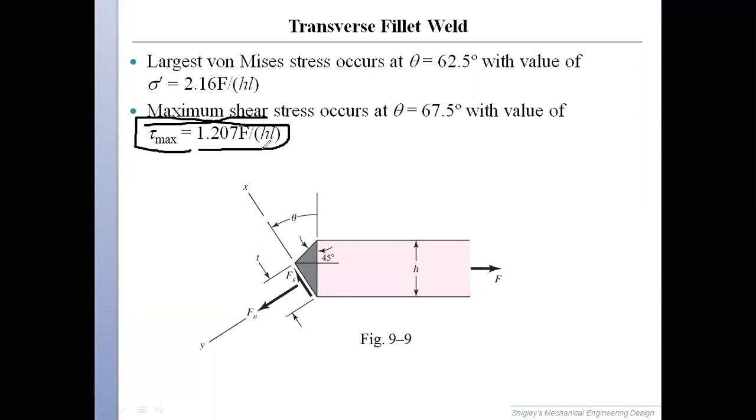We said that the maximum shear stress is equal to 1.2 times F over HL. But now what we are saying is taking the conservative approach. If we look over here, when we calculate the stress, we say that it is 1.414 times F over HL as compared to 1.2 times F over HL. So if we compare this, we are basically taking the estimate of the stress 1.17 times more than the one that we had.

So now what we have here is, okay, we are going to take this conservative approach to analyze our fillet welds. So let's see, when we do that, we can also treat.

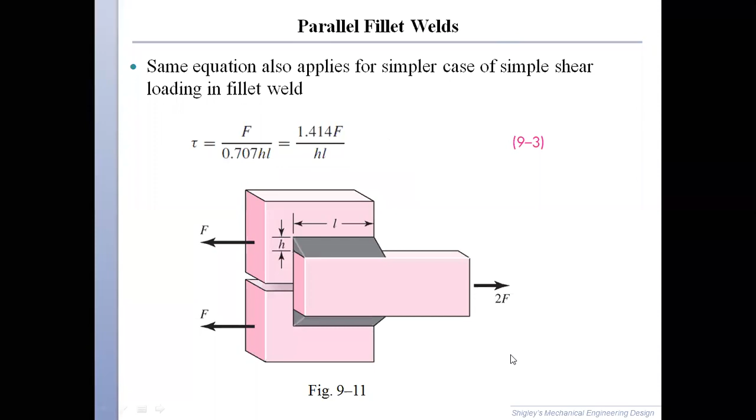Now let's see, if this is the case then let's see what we will do, there is another situation. For example, that was just straight on the welded joint, where the load was passing through the same welded joint.

But just as in the bolts where we discussed eccentric loading, we can have that situation over here, that let's say this is your welded joint. This is your welded joint basically, and your load is applied over here, right?

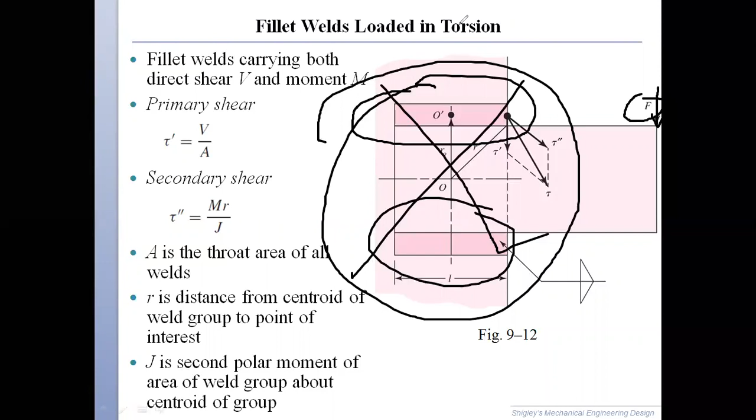So there is the weldment and the force that is applied is not exactly applied on the welded joint, but it is at some eccentricity, right? So again, we can have the situation over here, which we just discussed in our bolted joints, that we will have two kinds of stresses over here.

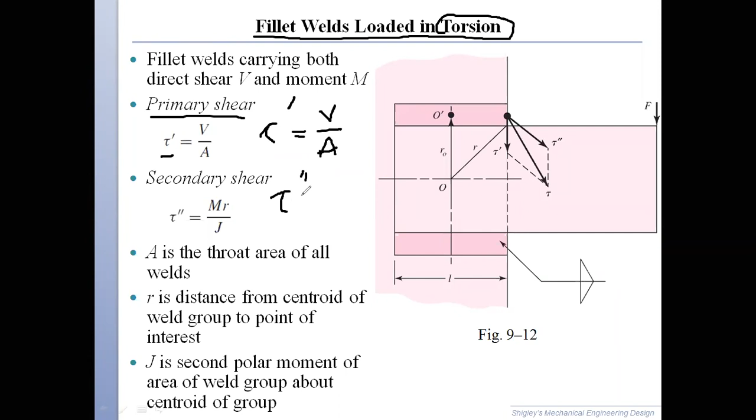Now, let's say that this fillet weld is loaded in torsion. Torsion means that we have a twist in here. So there are going to be two components of the shear, which is the primary shear, and that primary shear will be tau dash, which will be equal to V divided by A, which is the shear force divided by A, and we will have another component, which is the secondary shear, and that will be equal to TR by J. So that's MR by J, because M and T are the same, force into force arm multiplied by R, divided by J.

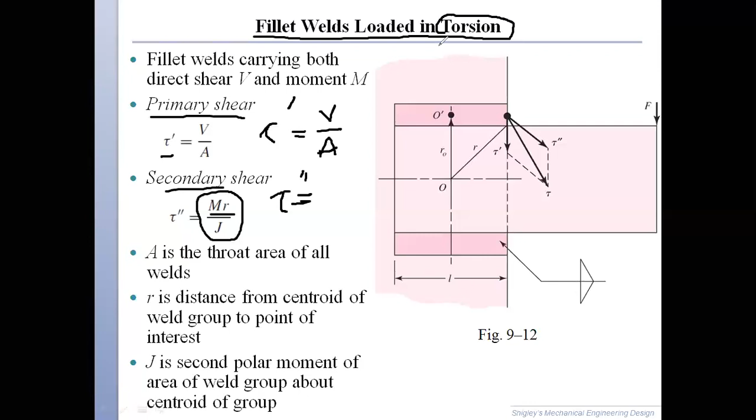Now, the thing is, how do we deal with such situations in welded joints is that A is the throat area of all the welds. All the welds mean we can have a weld over here, we can have a weld over here, we can rather have a weld over here. How do we combine them? How do we group them?

Just like the bolted joints we did, we'll take the same approach: take the centroid of the welded group to some point of interest, and calculate the required values. For example, J is the second polar moment of area if we are dealing with torsion, because that is used in torsion.

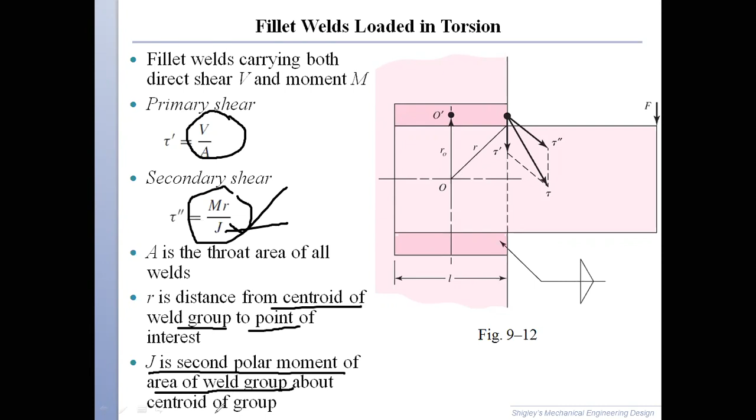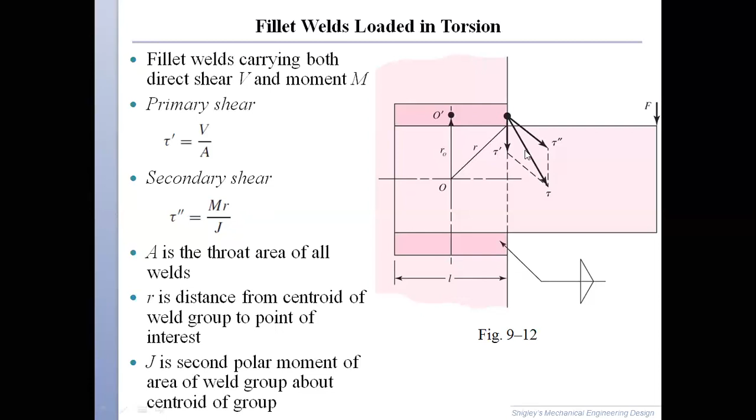So how do we find this moment of area of the weldment group about the centroid of the group? Let's see that. We are going to represent a welded joint.

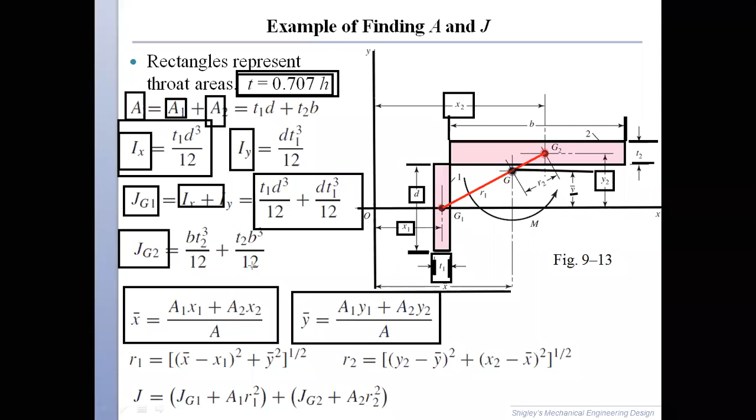So now we have these j's. We can combine jg1 and jg2 with this theorem, and our j will be equal to, if we find out r1, because what will be r1?

From this geometry, if you look over here, we have this triangle, right? Now it's a right angle triangle, so the square of this plus the square of this is equal to the square of this.

So R1 will be equal to this dimension. What is this dimension? This is basically x bar minus x1. X bar, okay, this whole is x bar, and if I remove this from it, this dimension will become x bar minus x1.

So I have this dimension now: the square of x bar minus x1 plus y bar square is equal to r1 square. So I have this equation, and from this I can calculate r1.

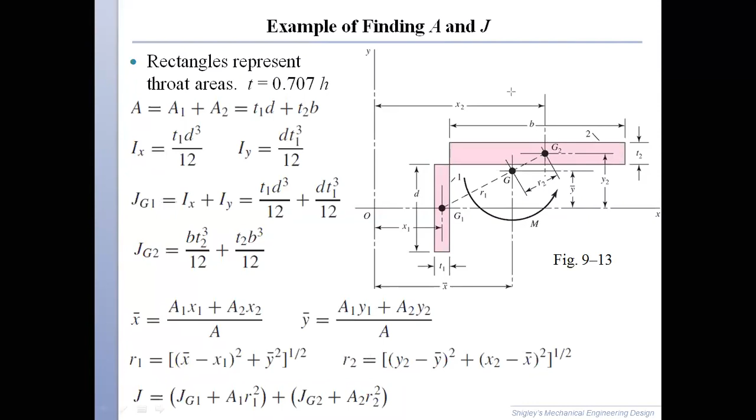Similarly, I can also calculate my R2, because here also I have another triangle, this one. So I can calculate R1 and R2 from here, and I'll find my J. Once I find X bar, Y bar, R1, R2, and J, now I am able to move forward and do my calculations.

But there is one more thing. Let's say I represent this weldment and this weldment by something else — by a line. Instead of putting the triangle, let me put it in red. Let's say I have this weldment, and I have another weldment over here which I represent by this.

Now what happened to T1 and T2? Can someone answer me? Half it will become — half, no, absolutely it's not there at all. I am just representing the first weldment by this and the second weldment by this.

That's it. So what I am doing here is, if you compare these two — if I say that T1 d cube, T1 is a very small dimension. Similarly, T2 is a very small dimension. If I cube this B cube, T2 is also very small as compared to that. So for now, I just say T1 is equal to 1 and T2 is equal to 1.

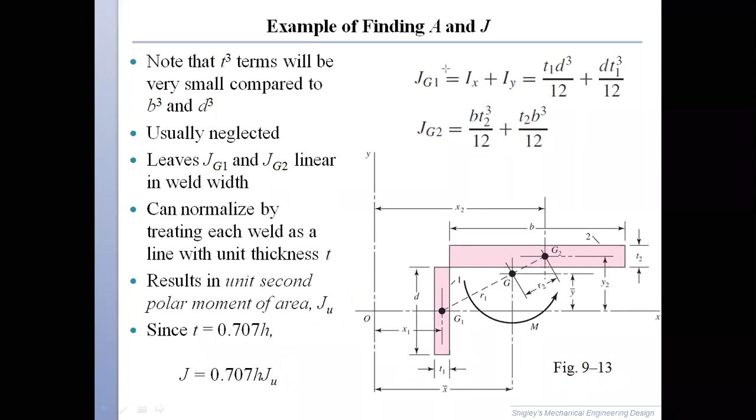So now I can calculate my actual J when I multiply Ju by t. And if I multiply Ju by t, t is 0.707 times h, so that is 0.707 times h times Ju. So it makes it easier for you, you don't have to calculate this, but there is just a table.

What does this table say? This table says that if you have a geometry like this, we know the throat area, A is equal to 0.707 times HD. The location of G, x bar y bar, is given to you by this table. It also gives you the value of Ju, and if you multiply this value of Ju by 0.707 times H, it gives you J.

Similarly, if the geometry looks like this, then A is equal to 1.414 times HD. Why is it 1.414 times HD? Can someone comment on this? It is because it is double of this. This is 0.707, this is one weldment multiplied by 2, so that makes it 1.414 times.

Similarly, x bar is b by 2. Where does x bar come from? Half of this and half of that because of symmetry. So b by 2 and d by 2.

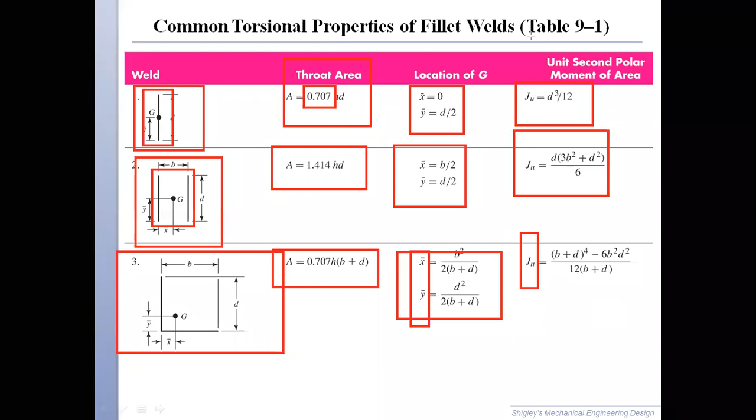But they are already calculated for you, you don't need to think about it. Just come to this table and have a look at the geometry, you will compare your geometry with it. It will give you area, it will also give you x bar y bar, and it will give you the value of Ju. You can multiply this value of Ju by 0.707 times of h, and that will give you the actual J. So there are different cases in here to which you can compare whatever problem you have, and from this table 9-1 you can find the values of all these.

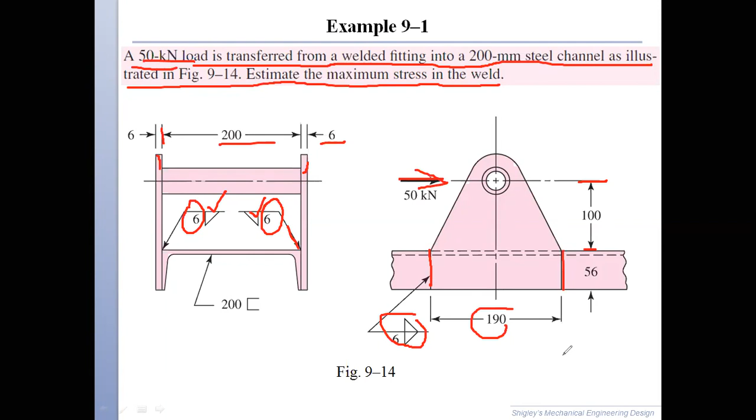Now if we look at this and draw the free body diagram for this, it is going to look something like this. If we have two sides, 1 and 2, and a 50 kilonewton load is applied, it will be 50 divided by 2, so that becomes 25.

So the load is 25 kilonewton. And then looking at this figure, we can figure out the values of these: 100, and 110.4 from here to this point. Similarly, this is 190, so it's going to be 95 on one side and 95 on the other side, and we already have this 56. So we can figure out these values.

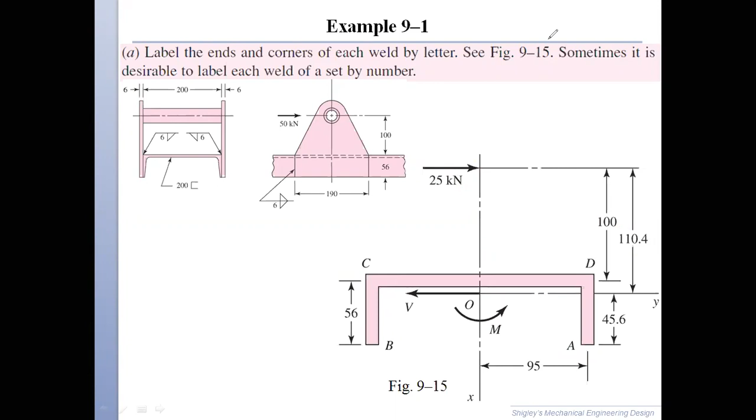Now what do we need to do? What will be the next step? We are going to look at this structure, the weldment that we have, and compare it to the table we just talked about. So let's go ahead and look at the table. So if we look at the table, what do we see? Let's go there and see if it looks like this.

Does it look like this? No. Does it look like this? No. Does it look like this? No, okay. So move to the next page.

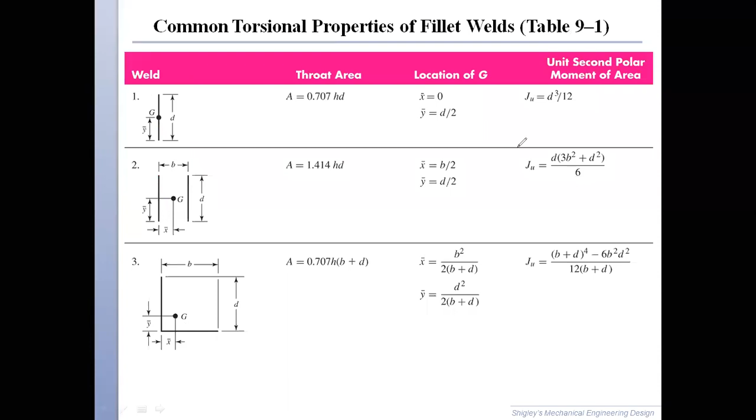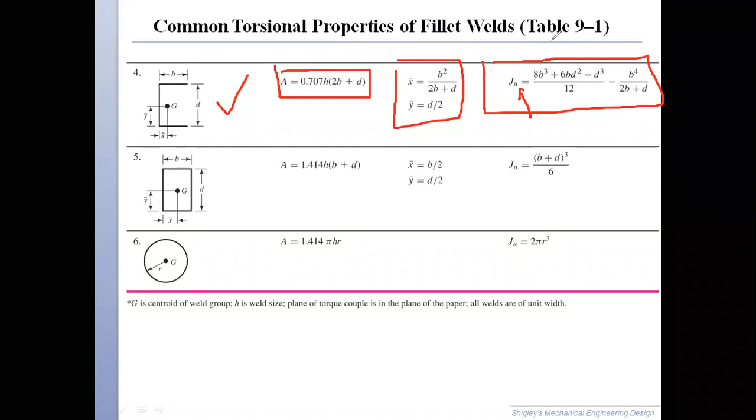That means we will get J, right? So let's see, doing that. First of all, we can find out the area using the formula given over there.

As far as the primary shear is concerned, tau dash, which is equal to V by A. So now let's find out x bar and y bar from the table again, and we can find out our RA, RB, RC, and RD from here. Once we find these, we can find out J.

As I just said, how do we find J? How do we find J? You multiply that 0.707 times h multiplied by Ju. So this is how we get our J.

Moment is F times L, okay. We know what F times L is. If we go back, we can see what our F times L will be.

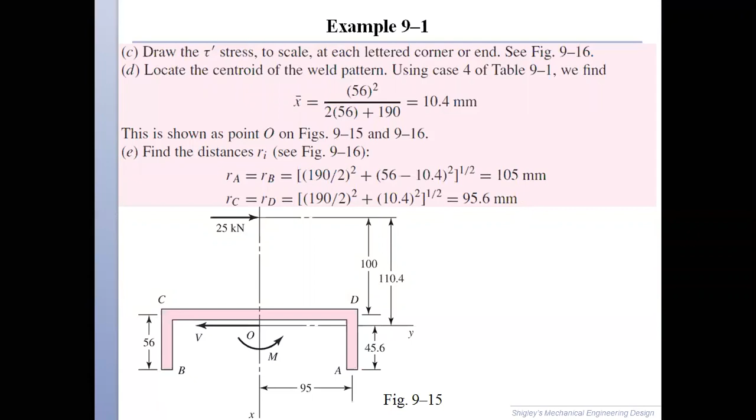This is your F, which is 25, and let's say how much L will be. L will be 110.4, 110.4, okay. So we will multiply that by 110.4.

Now we can find out our tau dash A, tau double dash A, tau double dash B, tau double dash C, and tau double dash D. So where is the maximum stress?

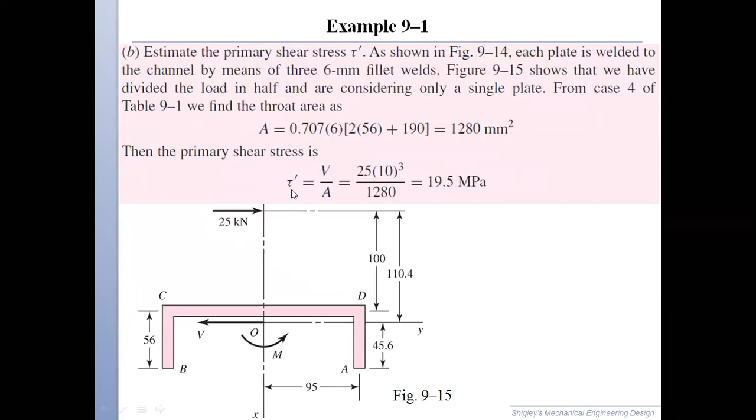I mean the stress component is this, 41. But what do we need to do? We need to sum these two, tau dash plus tau double dash, at A and B and C and D. So we will add all of these.

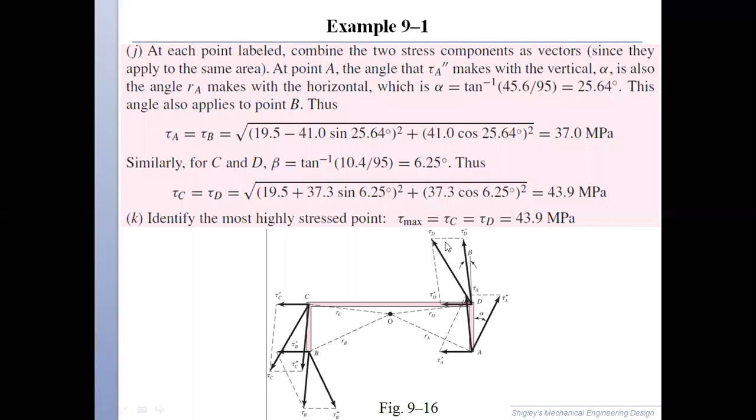Similarly, now let's look at one more thing here. The same kind of thing we are going to follow for fillet welds loaded in bending. In bending, what will happen? Bending means MC over I.

So just like there we had TC by J, here one component will be sigma dash. And the other component, that will be sigma double dash, if the load is applied somewhere else, not exactly at the weldment.

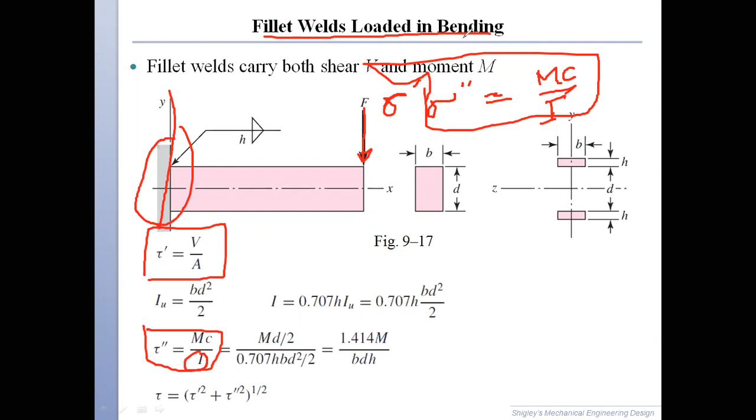So you will compare your weldment with this, you have area, the x bar, y bar, and Iu. You multiply this Iu by 0.707 times h, and you will get your I.

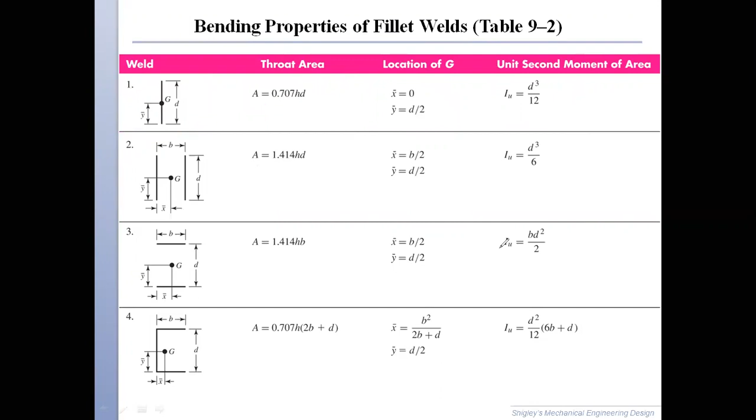So once you get your I, you can calculate your sigma dash and sigma double dash, the primary component and the secondary component. So you all will find this. With that you can have your calculation of the stress due to bending, summing sigma dash and sigma double dash. I think this should be enough for today, okay.